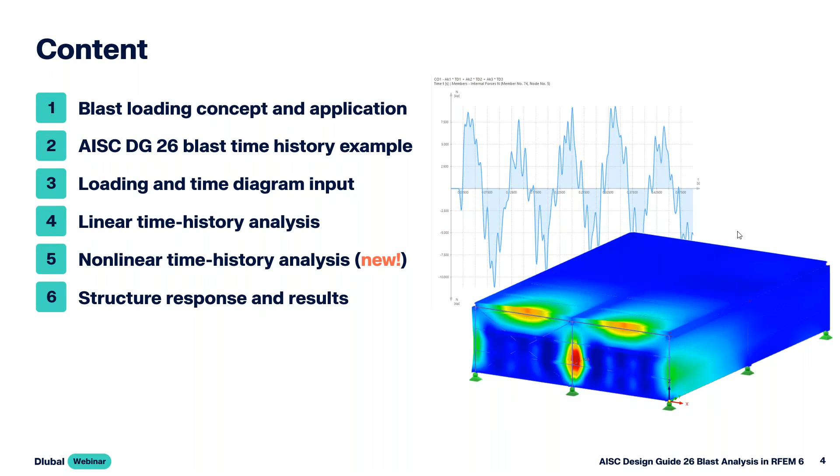So we'll turn now to the blast loading basics. The design resources we'll be referencing today are, of course, the AISC Design Guide 26, which covers the design of blast-resistant structures. The United Facilities Criteria, UFC document 3-340-02, will also be one of our resources. There are many other references and literature out there for blast analysis, but for our approach and example today, we'll be utilizing these two.

Let's talk about factors that influence structural damage when we talk about rare blast loading. The structure materials, mass, and stiffness are all certainly going to influence this. But we also want to take a look at the explosive type, and how close the distance is to the structure. Obviously, if the explosion is closer, we're going to see more localized and global structural damage than if the explosion is further away. The building geometry will also play an influence.

The blast orientation to the structure matters too. Elements facing the blast will see higher loads and more damage than elements that are parallel to the blast. And finally, the surrounding structures or adjacent elements can also affect blast patterns. We could see load amplification or load reduction.

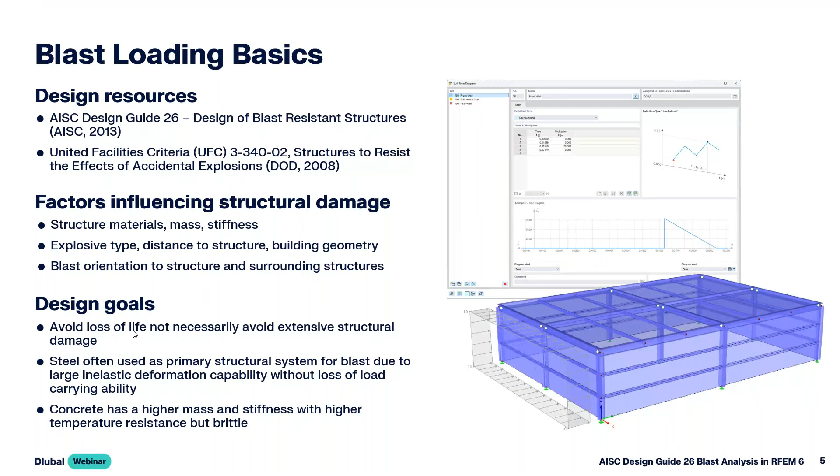Turning now to Design Guide 26 to talk about the blast load application and this idealized pressure time history for blast load.

We start off with the peak overpressure. This is the pressure above the ambient atmospheric pressure, hence the name overpressure. This is an instantaneous pressure arriving at the structure. We have this blast load taking place at time equals 0. It takes some time for the blast wave to reach the structure. So we have our time of arrival, and then we see this instantaneous rise in pressure on the structure itself.

We then have the positive phase duration, which is the time for the pressure to return back to that ambient pressure. We also have in the positive phase duration what we call the positive impulse - the total pressure time energy applied during the positive duration, simply the area under the curve. In addition to the positive phase, we also have the negative phase duration - the energy, the impulse, again that area under the curve that follows the positive phase, where pressure actually falls below the atmospheric pressure.

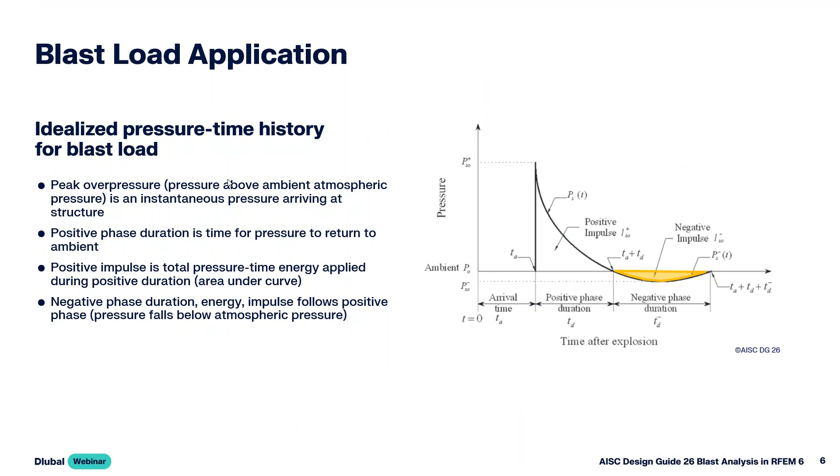We start first with the free field blast load, also known as the side-on blast load, where this blast travels parallel to a surface. It more or less sweeps over this surface with no impeding objects - so we might be talking about sidewalls, a roof, a rear wall. It's certainly not the surfaces oriented directly to the blast. We often see the subscript SO for side-on used throughout literature to represent this particular loading.

Then we have the reflected blast load, where the blast load strikes at an angled surface other than parallel. We might see this for a wall oriented directly normal to the face of the blast load itself. You'll notice that we have a reflected pressure value that's significantly greater than our side-on, and this makes sense because it's closer to the blast and oriented normal to the face of it.

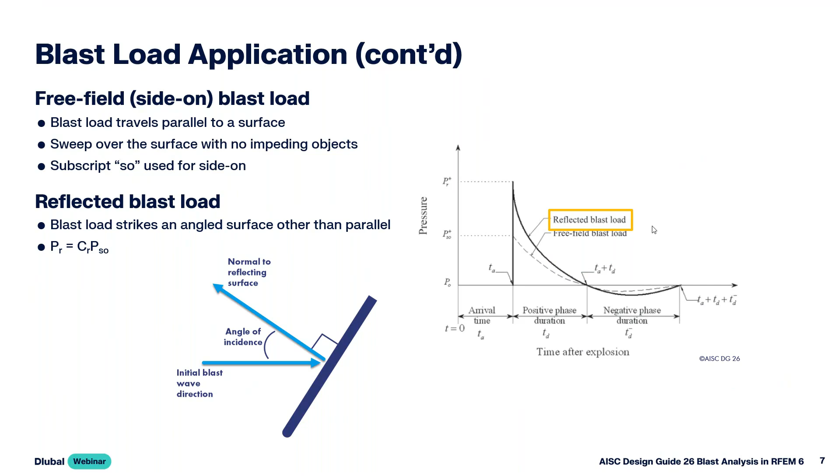Now we may be wondering, what is the angle of incidence along the x-axis? We'll refer to this small diagram on the left-hand side, where we have our initial blast wave direction, and this travels to our target element - this might be a wall element, for example. We're going to see this load reflecting normal to the face of the surface, hence why we see this 90 degrees here. The angle of incidence is then measured as this initial blast wave in comparison to this reflecting load, and this is ultimately what we use with figure 2-193.

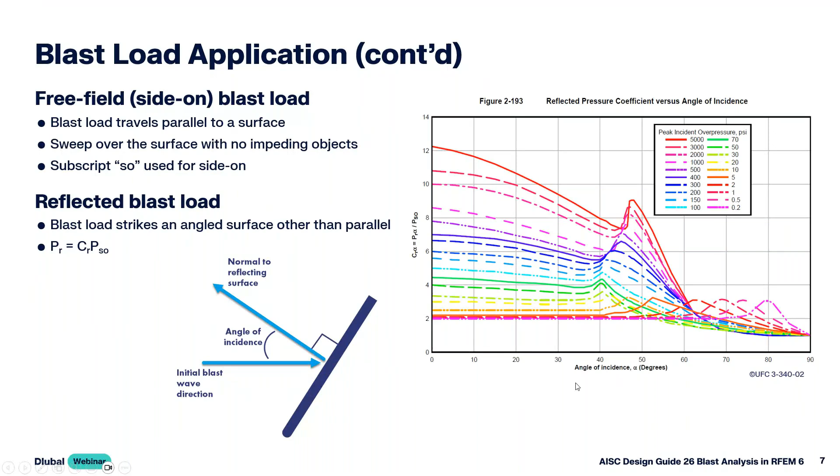The equation that we use for this duration is equal to 2 times I over P.

Moving on to the pressure time history for the negative phase, we're actually going to neglect this for this demonstration. A simpler approach here, but we certainly don't want to always neglect this. For example, when we have elements that are weaker in the reverse loading direction, or a structure with very short natural periods compared to the load duration, we certainly don't want to neglect this negative phase. But for example purposes today, we will go ahead and not take this into account.

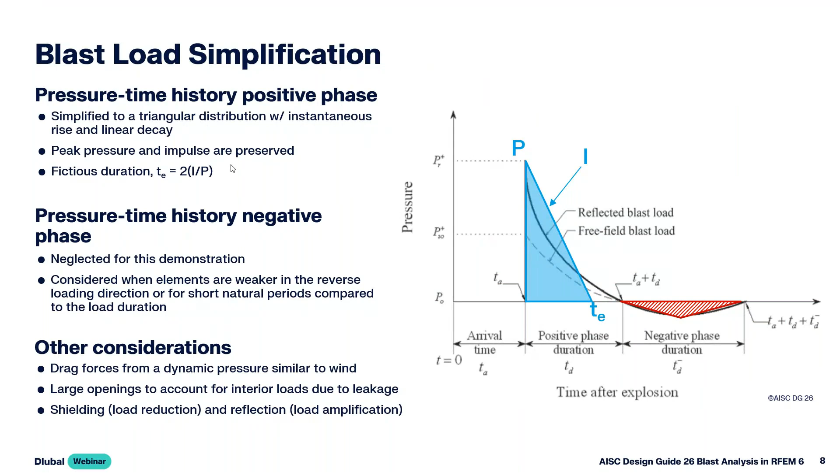Now, we won't be touching on either of these more seismic-focused add-ons for today. But finally, we do have the time history analysis, and this will certainly be a big part of our example once we get into RFEM, where we can apply these forces to the structure and tell them how they should vary in magnitude over a set time period.

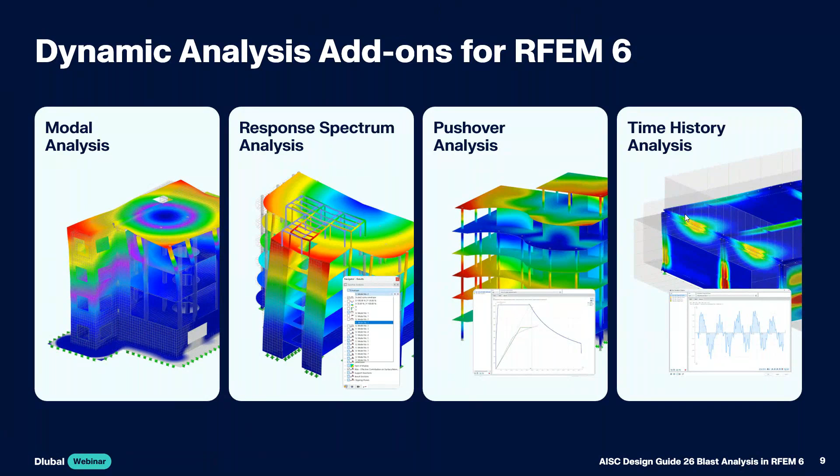Before we get into the program, we'll move on to our next slide, where we're going to lay out the example that we're pulling directly from Design Guide 26, example 2.1. In this example problem, we have a one-story steel structure, 50 feet in the short direction, 70 feet in the long direction, and 15 feet in height. I took a simple screenshot directly from the design guide, showing a plan view and an elevation view.

In the short direction, we have braced frames, and in the long direction, we have rigid or moment frames. All of the cross sections used should be hot rolled cross sections. And for our roof deck and wall panel, we will set these as ribbed metal decking.

And finally, we have the blast load itself. The blast charge weight is going to be 500 pounds, and the charge distance is going to be 50 feet. We can see this represented here, this blast load located 50 feet from the front face of the structure.

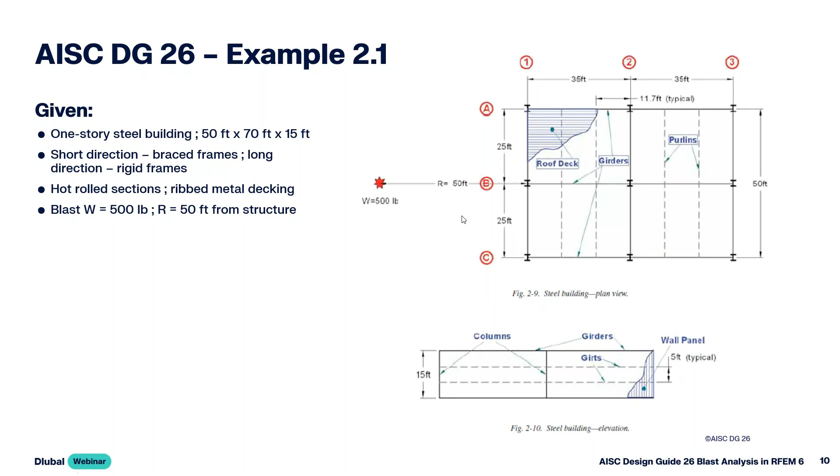Now we want to move on to our solution, which involves generating or calculating these time diagrams that we will eventually input into RFEM itself. We begin with the scaled distance Z. In Design Guide 26, this is a simple equation: our charge distance over the cubed root of the charge weight. We know this is 50 feet for the distance, 500 pounds for the charge weight, and we get a value of 6.3.

We're now going to refer back to UFC 3-340, in particular figure 2-15, because we need to determine all of these variables from the idealized pressure curve, which is done directly within this figure itself. Before we get into the actual values, there are some assumptions made with this particular plot. For example, this assumes a hemispherical explosion taking place at ground level. If you have an explosion that takes place up in the air, a spherical explosion, there are different plots that you should reference.

This also assumes that our structure is at sea level. If we have any other altitude, there are scaling approaches we could take directly from the UFC. This plot also assumes a fully reflected surface, so if we had any angle, remember a couple slides back, we'd want to refer to that reflection coefficient and angle of incidence to scale our pressures and variables accordingly.

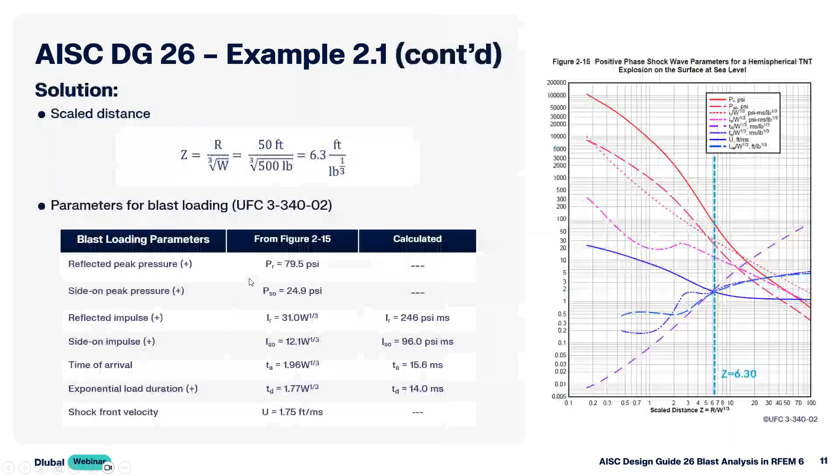Let us begin with the reflected pressure for the front wall. Following Design Guide 26, we simplify the idealized pressure curve with this equivalent triangular shape, but we want to ensure the peak pressure P sub r and the impulse I sub r are preserved. We don't know what this equivalent duration is, but we have a simple formula - we simply input the impulse and pressure. This information was given directly in figure 2-15 determined on the previous slide.

Now we move on to the side-on pressure - this is the time diagram for the sidewalls and roof. For simplicity and a more conservative approach, I am going to use the same scale distance Z at the front wall centerline for the sidewalls and roof. Technically pressures might decrease as we move along the length of these sidewalls and roof, but this is a more conservative approach. We have a similar triangular shape shown on the right-hand side, but we'd expect our pressures to be significantly lower, and our impulses will be lower as well.

Again we don't know this time duration, but we know P sub SO and I sub SO from the previous slide, figure 2-15. We input them into this equation and we are calculating here a time duration of 7.71 milliseconds.

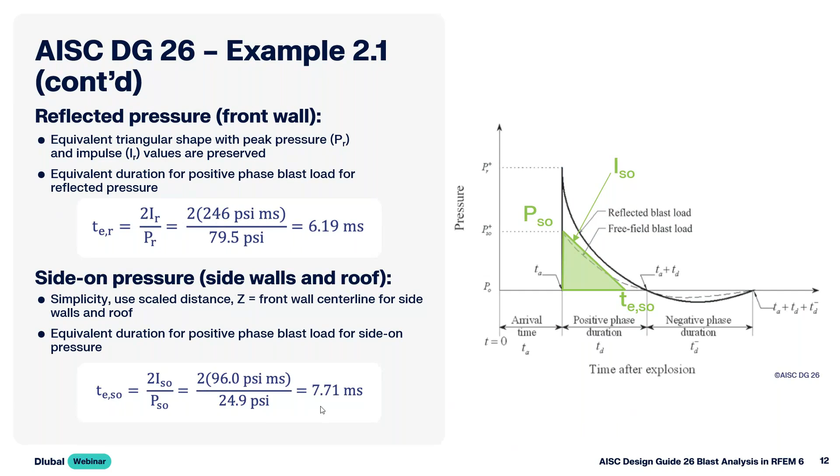Now finally we turn to the rear wall. For this one we want to modify our charge distance. This rear wall takes into consideration the distance from the blast to the front face of the structure, which is 50 feet, but then we also have the length of the structure of 70 feet. So our new distance adds these two together to get 120 feet. Modifying our scale distance with the equation r over the cube root of w, we input the 120 feet, we still have 500 pounds, and we get a value of 15.1.

We use the same UFC figure 2-15 here. We plot our Z value and get the various parameters now for our rear wall, presented within this table - again the positive phase duration. You'll notice I did not list any reflected pressures or reflected impulses. That's because this back wall is not exposed normal to the face of the explosion, unlike the front wall. So we're more interested in those lower pressures, like the side-on peak pressure and side-on impulse. Again, for that triangular distribution we don't know our time duration. We input this information and get a value of 19.1 milliseconds.

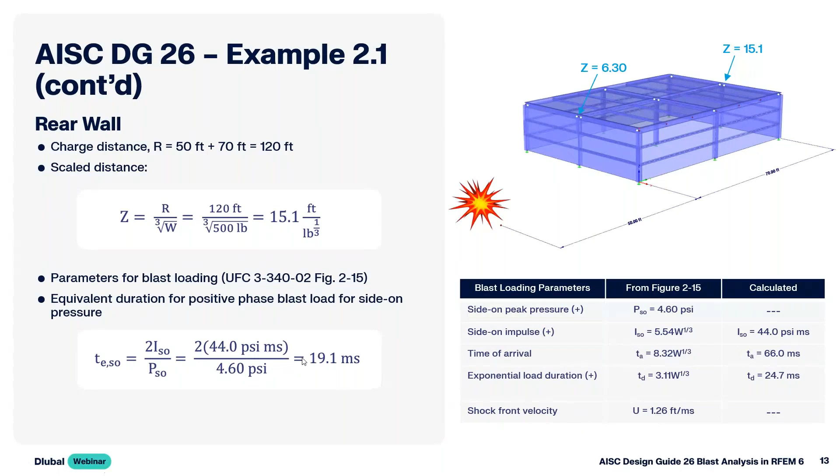Now the rear wall is a little unique too, in that we aren't going to have this instantaneous rise in pressure like we saw with the front wall or even the sidewalls and roof. It's going to take some time for the pressure to linearly increase to the value of the peak pressure, and then we linearly decrease. We know the time of arrival, that's equal to 66 milliseconds.

And that was just given directly from figure 2-15, as you see here on the previous slide. We are now looking to solve for T sub 2, which is the time to the peak pressure.

We account for this, given in Design Guide 26, by taking the time of arrival and adding L1 over U, where L1 is the span of the element parallel to the traveling wave. In our case, this is the building height of 15 feet. U is the shock front velocity, given directly in figure 2-15. We input these values into this equation and get a time duration of 77.9 milliseconds.

So now we know T sub A, we know T sub 2. The final time we need to determine is T sub F. This is a simple equation: we take T sub 2 that we solved for above, and add in the equivalent duration we solved for on the previous slide, taking into consideration the impulse and the pressure. We take 19.1 milliseconds, add it to 77.9, and get our final time point of 97 milliseconds.

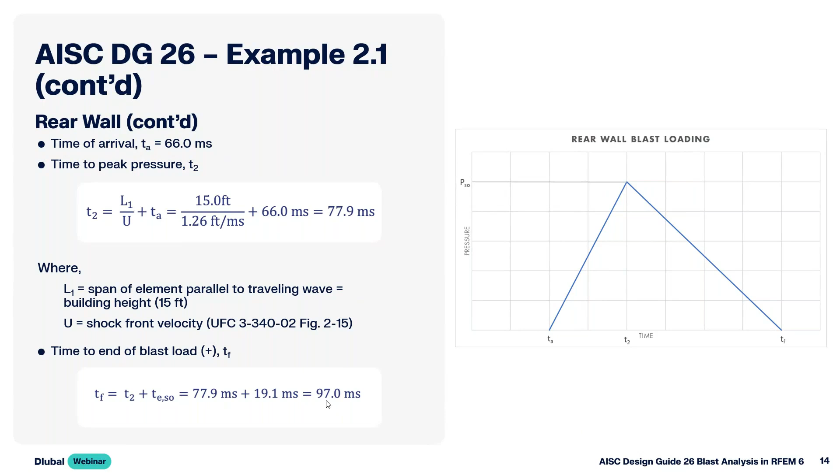Let's summarize a few of the assumptions again for this analysis. We're using this equivalent triangular loading function, much more simplified. There are more exact loading functions out there, for example the Friedlander equation, if we wanted to more accurately represent that blast wave shape. Also, the negative phase of the shock was neglected for this example, along with other variables we listed, such as dynamic pressures with drag forces and large openings, which are not included.

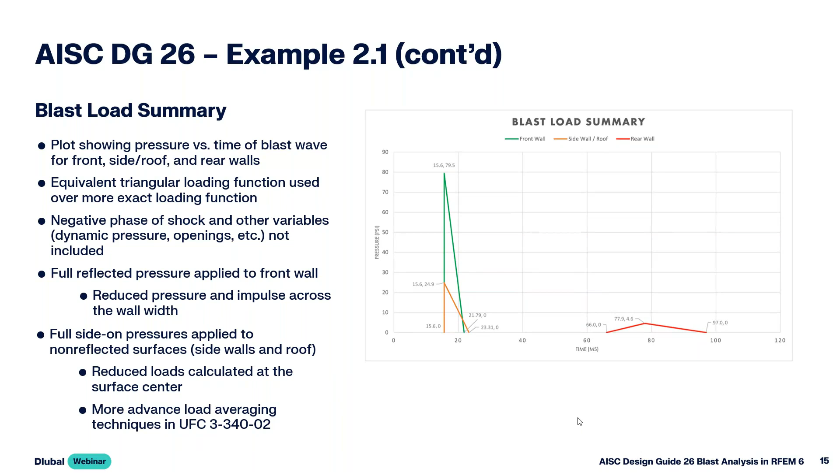Okay, so we are going to turn now to RFEM directly, and I will go ahead and launch the program. For the sake of time, I have already modeled our structure from the Design Guide example given, so we'll do a quick model review.

There were some assumptions made with the cross sections. We have W14 by 193 defined for our columns, A992 material. Our girders are defined as 18 by 130. We have our purlins, channel sections, 10 by 25, A36 material, and our girts, which are 10 by 30, also A36.

Now, because we have braced frames in our short direction, I added in some X bracing here. These are just going to be round circular sections, such as a rod, for example. But you'll notice that the member type here is unique.

All the rest of our members in this example are set to a standard beam. This is anything that's a standard beam, a standard column. But for my X braces, I have set this to a tension-only member. This means that it should only take tension forces. If compression is introduced into this member, it is deactivated within the static analysis. And if tension is reintroduced, it will be reactivated due to the nonlinear capabilities within RFEM. So just something to keep in mind there.

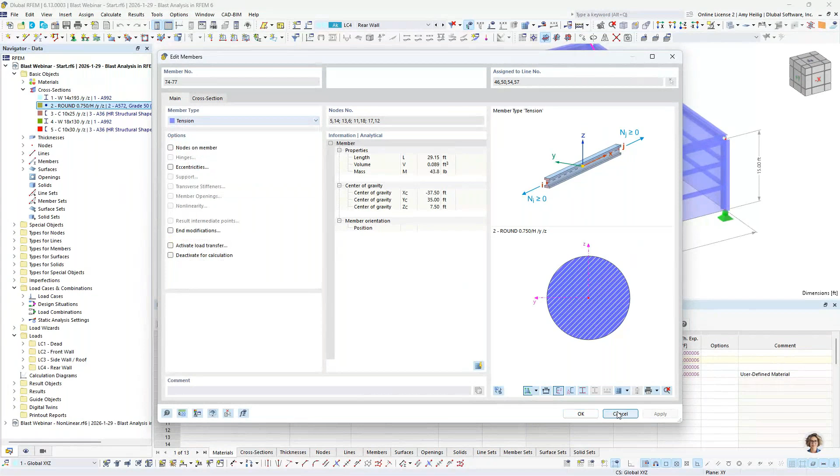Now, as far as our surfaces, all the surfaces are defined here. So we'll take a quick look at the front surface, for example. All have the material A653 applied to them and a set thickness. Now, this thickness is a bit unique as well.

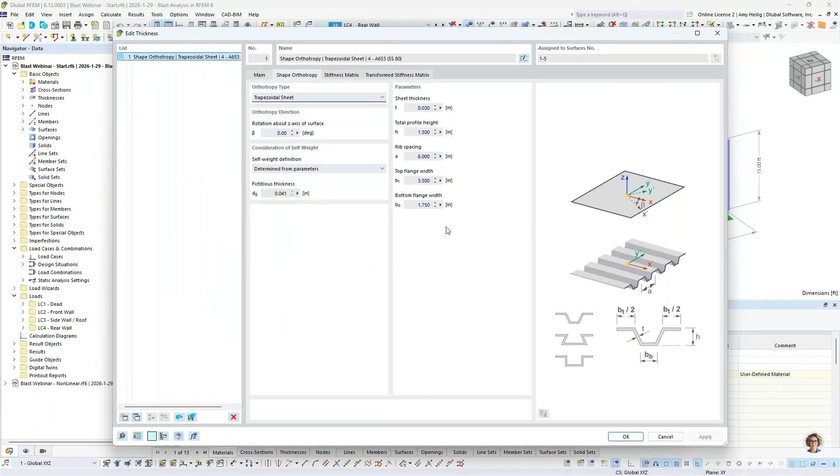If we take a look at the thickness type, normally we would set this to a uniform thickness, which is just any type of standard surface. But I did set this to an orthotropic stiffness instead. And with this orthotropic entry, we now get this second tab here where I can directly select something like a trapezoidal sheet. And I can input the sheet thickness, some of the geometric properties like the total profile height, the rib spacing, and so on. And the program is going to take all of this information for me and directly calculate the stiffness matrix based on this orthotropic stiffness properties. So this is all done automatically, and you have a nice view here of this stiffness matrix directly.

Okay, so the final thing just to note is, of course, the dimensions. We talked about 50 feet in the short direction, 70 feet in the long direction, 15 feet in height. And our blast analysis is going to be taking place about 50 feet away from the front face of this wall here. Now, we also want to cover our loading.

So I will launch our load cases and combinations dialog box. And under the base data, I have set here the ASCE 7, the latest 2022 standard. Now, this really doesn't play too much of an impact in our example today because I'm not generating my load combinations automatically. You can see this is turned off here.

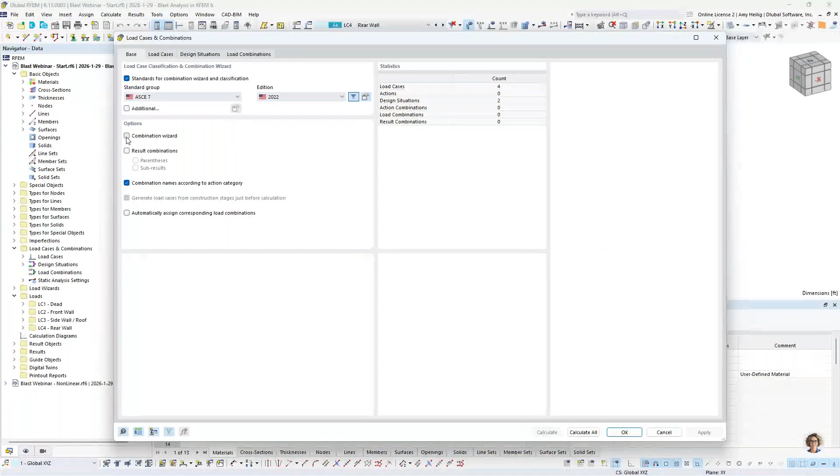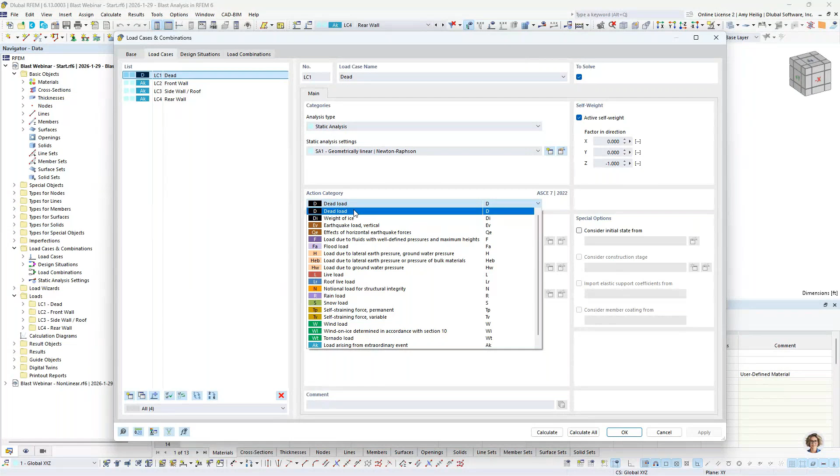Now, under the second tab, these are the various load cases that I've defined. And we start first with our dead load case. So we have self-weight activated within this load case. And I did assign the action category here based on the ASCE 7 to dead load. Now, again, this isn't so important. If we were combining into the load combinations automatically, the program would need to know this in order to know what load factors are defined. But just for a nice categorization, we'll go ahead and apply this to the correct action category.

I have 3 additional load cases here, including the front wall and the sidewall and roof, as well as the rear wall. So this is going to represent these loads from the blast being applied to the structure. The action category here is set to the load arising from extraordinary event. So now that we have our load cases defined, we need to actually apply the loads to the structure.

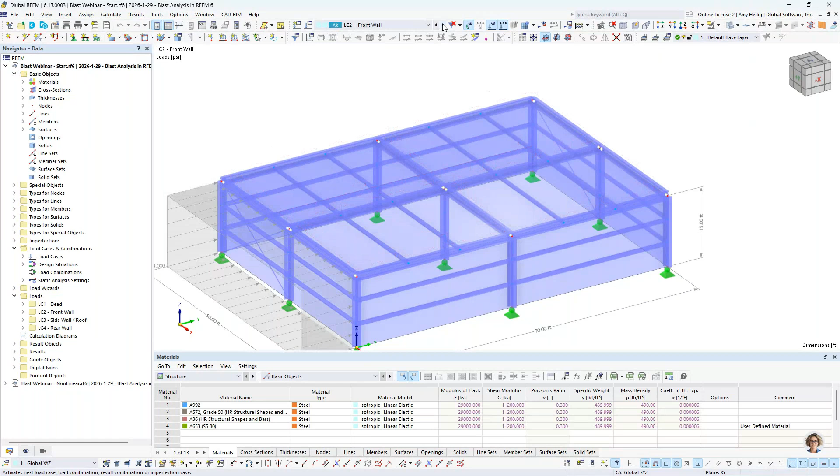And we begin with first our dead load. So remember, self-weight is considered here, but also I have applied an additional member load to my main girders up at the top of 0.1 kips per foot, just to account for any additional dead load within the structure. I then have that first load case here for my front wall. So you can see that this is a uniform load applied to this front face of this surface.

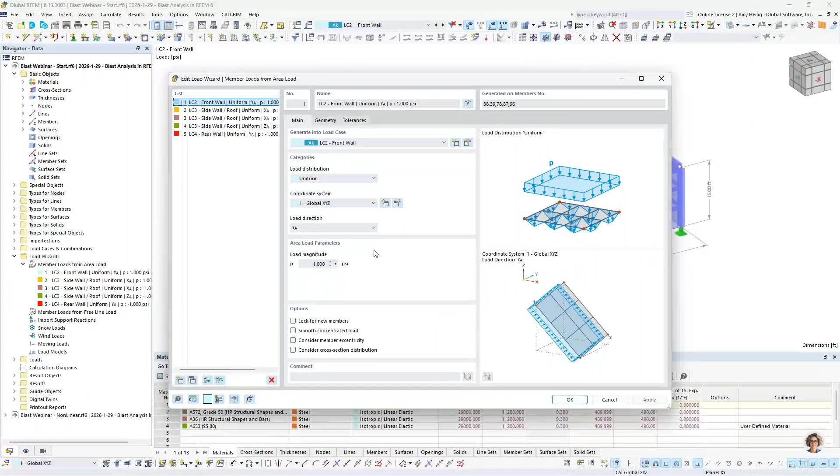Now, this load is a bit special in the sense that I did take advantage here of our load wizards over in the navigator, where I can apply these as member loads by specifying an area load. So if I double click on this load, we go into the load wizard dialog box. I have applied the load in the global Y direction towards that front face of that structure, and I gave it a load magnitude of 1 psi. This is just a simple unit load. So we're going to later on define the time diagram where this load is going to vary in magnitude. So we don't want to do it here with this applied load. This is why it's just a simple 1 psi.

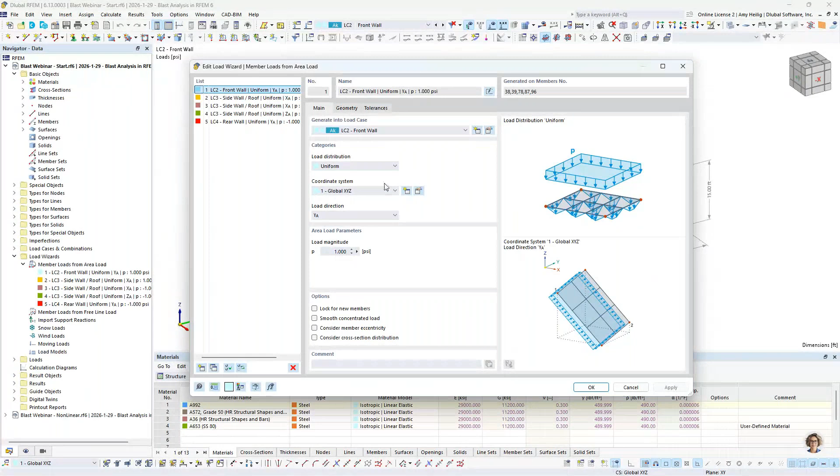Now, if any of your units are incorrect, you can always access down here the units and decimal places and make adjustments to that. So we also have the ability here to select the 4 points for this area load, and we can also neglect members. So for example, I didn't want to consider the load being applied to my girts.

So once this is done, you'll see we get a nice view here of the tributary area of the members that this load will be applied to. And we can take this a step further by right-clicking and displaying separately to see the load actually applied to the structure itself and the particular members that I have selected.

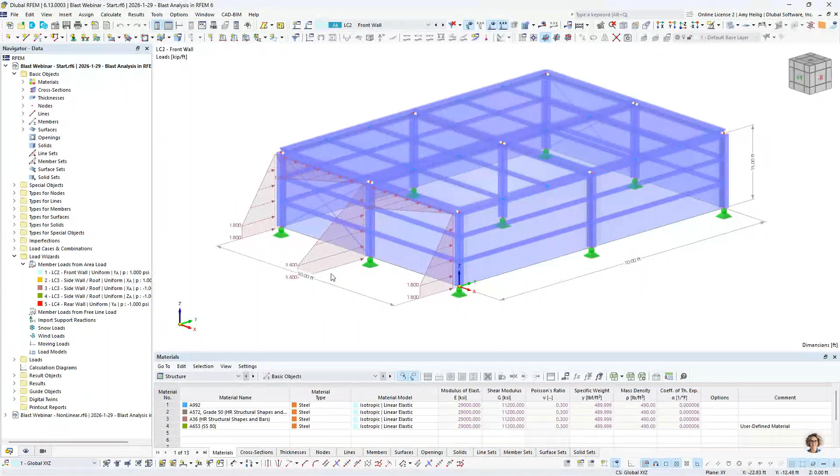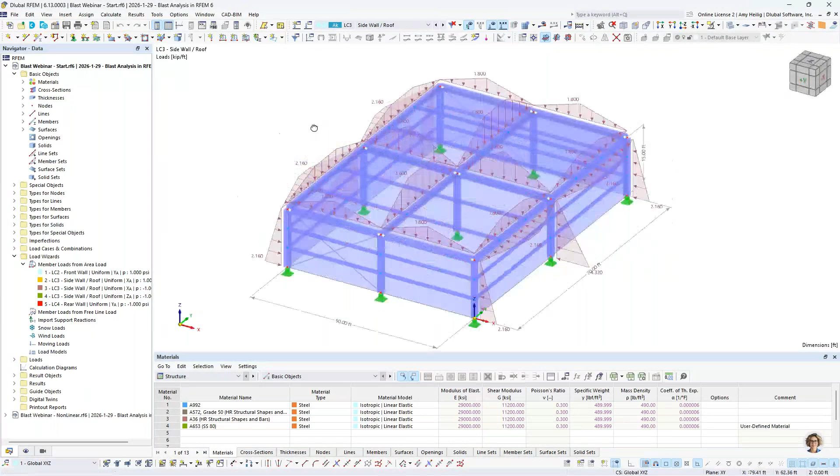So we can right-click to turn this back to a uniform load display, and we can take a look at our second load case for the blast load. Very similar concept here, but this time it's applied to the sidewalls and the roof. We can right-click here to display separately, and again we see those loads distributed here to the main members, neglecting again the girts and the purlins. And finally, we have our last load case here for our rear wall, so same concept there.

So now that we have these loads defined on the structure, we're ready to move forward with our dynamic analysis. And for this, we need to activate our base data dialog box. This can be found by right-clicking on the model name here in our navigator, or it can be accessed through our quick tools up here in the top. This is essentially the dialog box that will pop up when we create a new RFEM model.

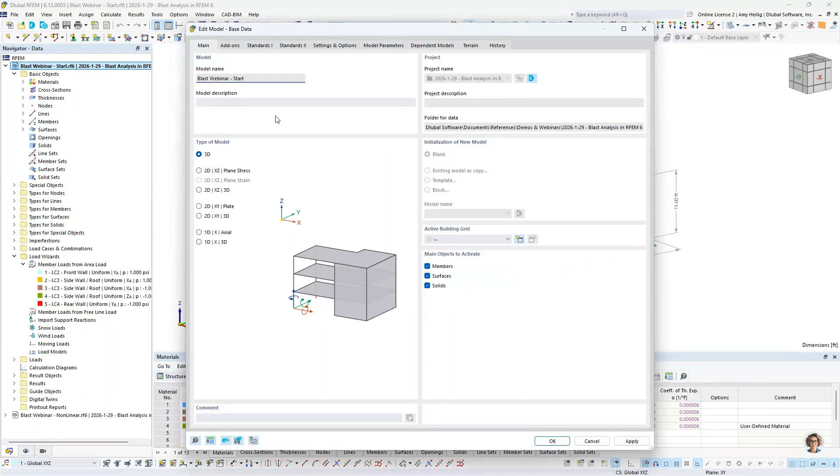And under this second tab, you'll see here, these are the various add-ons that we can go ahead and activate within our RFEM model itself. For today, I am going to move forward with both the modal analysis and the time history analysis.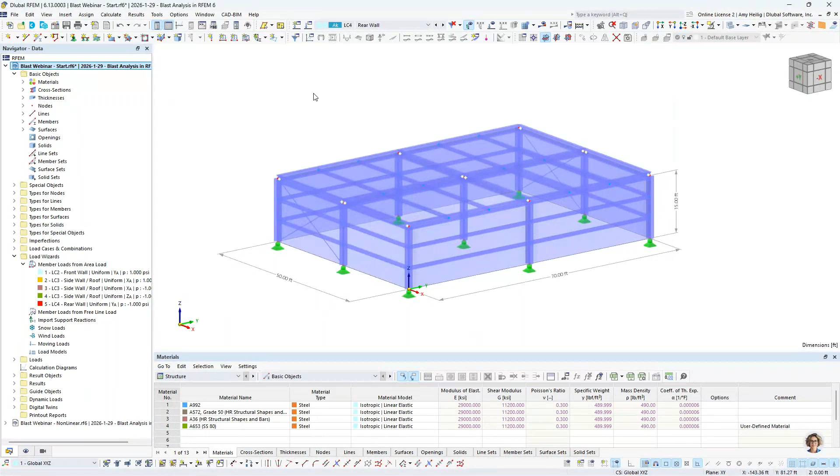So when we activate those add-ons and come back into RFEM, you can see that really doesn't look too much different. So what we want to do is to go into the load cases and combinations dialog box, and I'm going to create a new load case here. This is going to be for my modal analysis.

Now the analysis type here is going to be toggled down to modal analysis. This is available to me because I've activated that particular add-on. We then want to adjust the modal analysis settings. So for this, I'm going to calculate a total of 40 eigenmodes.

I want to make sure that I get enough mass participation, that I kind of understand what's going on with our structure. We'll go ahead and leave this as the Lanczos solver. I'm going to modify the mass matrix to diagonal.

Now remember that this blast load is traveling from the front of our structure to the rear of the structure in the global Y axis. We can't see that because of this dialog box, but that's kind of what's happening there for the overall analysis. So therefore, just for a quick calculation and to really hone in on what's going on in the Y translation direction only, I'm going to deactivate the additional degrees of freedom here for my mass matrix.

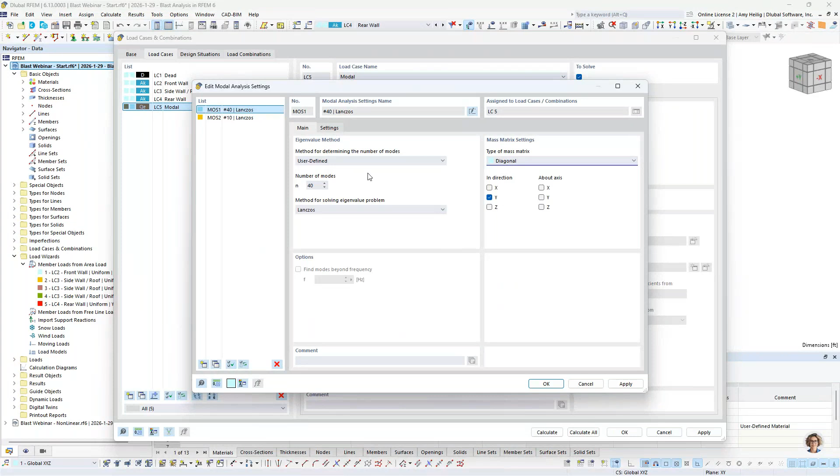Now for any further information on the different mass matrix types, solver types, you can always click on this info button in the lower left-hand corner of these dialog boxes. This will take you directly to our online manual and this particular dialog box to explain these options further. Now the additional settings here can all be left as default, so I can click OK.

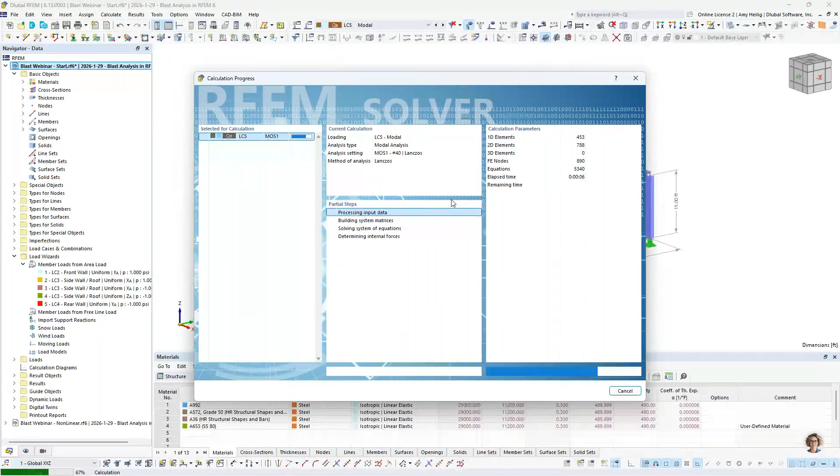We are going to import in the masses from our dead load case. We also have the ability, if we wanted to create a mass combination, we could do so. And essentially, we'll get a pretty quick analysis here. Again, the program is going to determine those 40 different eigenmodes, and we are presented with our analysis results.

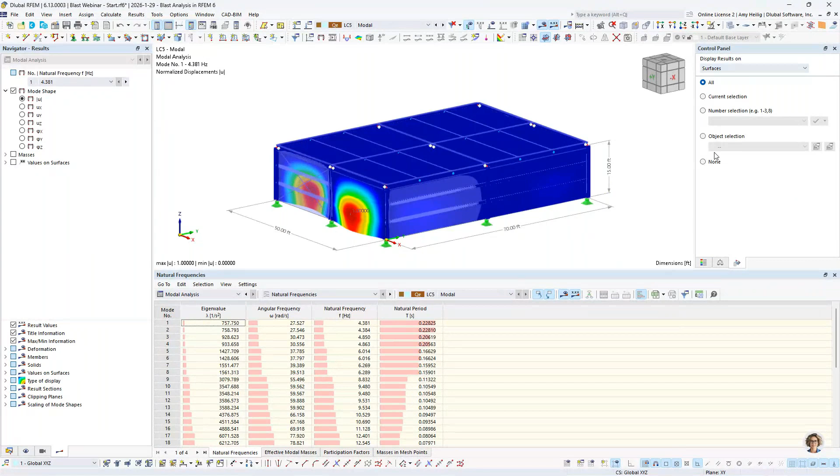So you see here that we have our modal analysis results presented to us in table format, and we now have a new tab over here in our navigator with the results shown as well. Because these loads are being applied to the members themselves, I'm not so interested in what's going on here with the surfaces. So I can always deactivate the surfaces from the display of my results by toggling this to none, and taking a look at the members themselves, and in particular, the second tab within the table.

We want to determine here what are our dominant mode shapes. Remember, we're only looking in the Y direction. And as I scroll down through this table, I see mode number 9. This certainly has the most mass participation, so this will be one of our dominant modes. And I want to note here that the natural frequency is updated over on the left. So we'd want to write this number down, 8.832 hertz, because we're going to utilize this later on for damping purposes.

And then we continue scrolling down to maybe find our second dominant mode, and that's going to be mode shape number 27. And we have a frequency here of 15.963. So we'll go ahead and write that one down as well.

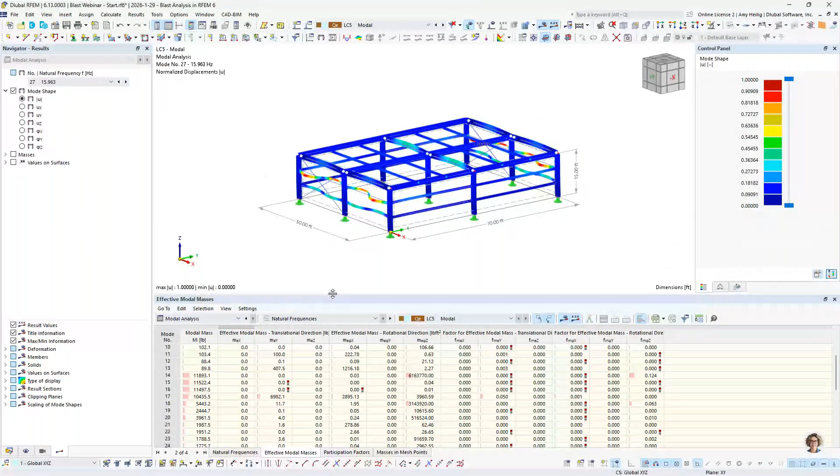Now that we have this information, it will make a little more sense as we move forward. Under the first tab, you can view mode shape number 9, where we can see the angular frequency, natural frequency, and natural periods. We're also interested in mode shape number 27. Keep those natural frequencies in mind, as we'll return to them when inputting the damping for the time history analysis.

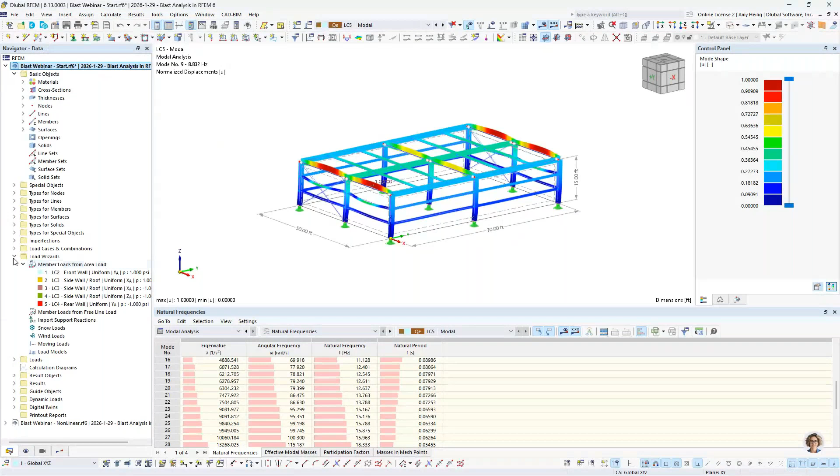Now that we have completed a quick modal analysis, let's move on to the time history. In our navigator on the left, there's a new folder called Dynamic Loads. This is because I've activated the time history analysis add-on, where I can directly define my time diagram. So I double click to create my first definition here.

Within my time diagram, this is where we begin inputting the information we determined from those slides and from Design Guide 26. We'll start by giving this a new name, and we'll call this one Front Wall. As far as the time diagram input, we have two options: we can set this to user defined, where we input the table values directly, which is what we'll use today. Alternatively, if you had a function—recall the Friedlander equation representing that idealized pressure curve in more detail—you could input that function directly in RFEM as well.

For our front wall, taking advantage of the user defined option, let's go back to the PowerPoint because I want to focus on this time diagram for the front wall only. We've already determined all of these points from our previous calculations: an instantaneous rise in pressure to 79.5 psi, then a linear decay back to 0. We've already determined the time values at each of these points, and these are what we'll directly input into RFEM for our first time diagram.

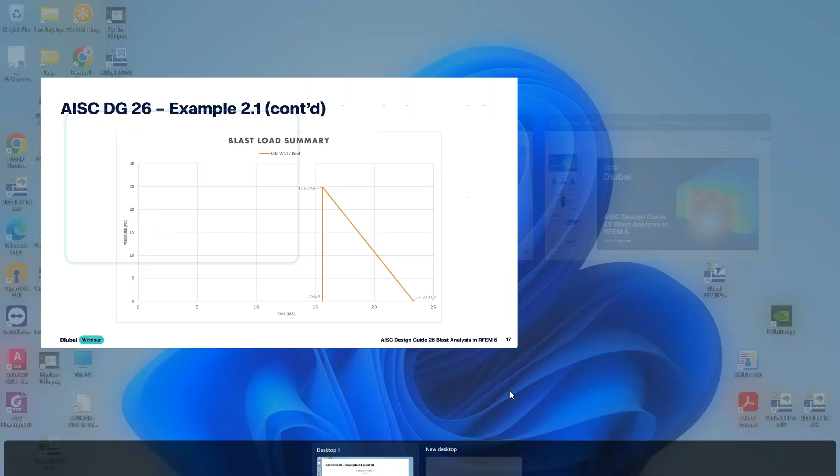Now that we have this first time diagram defined, I'm going to make a copy of it for my sidewall and roof. Going back to the PowerPoint for a quick overview of the sidewall and roof time diagram we calculated: it's the exact same shape as the front wall, with an instantaneous rise in pressure, but the peak pressure here is significantly lower because it's not oriented directly towards the blast. Then there's a linear decay back to 0. We already know all of these times, as we've solved for them, and this is the information we want to put directly into RFEM for our second time diagram.

The first three time inputs are actually all the same, but we do want to modify our multiplier here, which is the peak side-on pressure, to 24.9 psi.

And then our linear decay back to 0 is also slightly adjusted from our front wall, and this will be 0.02331. So with the program plotting these various points, we now see our time diagram that reflects our PowerPoint slide that we were just taking a look at. So we then have our final time diagram.

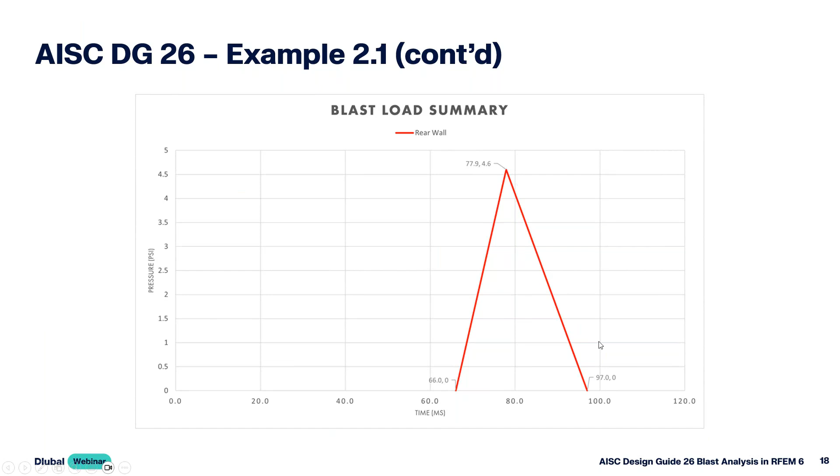And for this one, I'm going to create a new definition here, and this will be for the rear wall. We'll go back to our PowerPoint for the final time here to take a look at the time diagram we have determined for the rear wall. Now remember, this one looks a little bit different because it does take some time for that blast wave to reach the structure, but we have a linear rise here to that peak pressure, and then we'll see it decay linearly back to 0. Again, we know all of these points here, so this is directly what we will input in for our third time diagram.

The time 0 with a multiplier of 0, and then our second point will be 0.066, with a multiplier also of 0. Our third point will be 0.0779, and a multiplier of 4.6. Our final point is going to be 0.097 with a multiplier of 0. So therefore, we see that relevant time diagram shown here that replicates what we just saw in the PowerPoint.

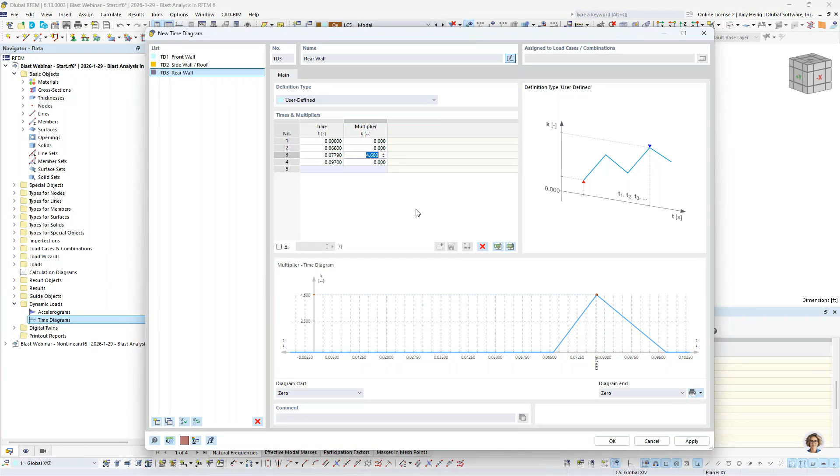Okay, so now that we have created these time diagrams, we need to actually correlate them with those unit loads that we had applied to our structure under the load cases. We'll go ahead and click OK through this dialog box, and we're going to go into our load cases and combinations. Now, I certainly could run a time history analysis for these individual load cases, as you see here within our dropdown, but that's not the intent of this example. The structure is not going to experience the front wall blast initially, and then the side wall and roof separate from the front wall and rear wall. All of this is happening at one time, but the magnitudes are going to vary over that time duration.

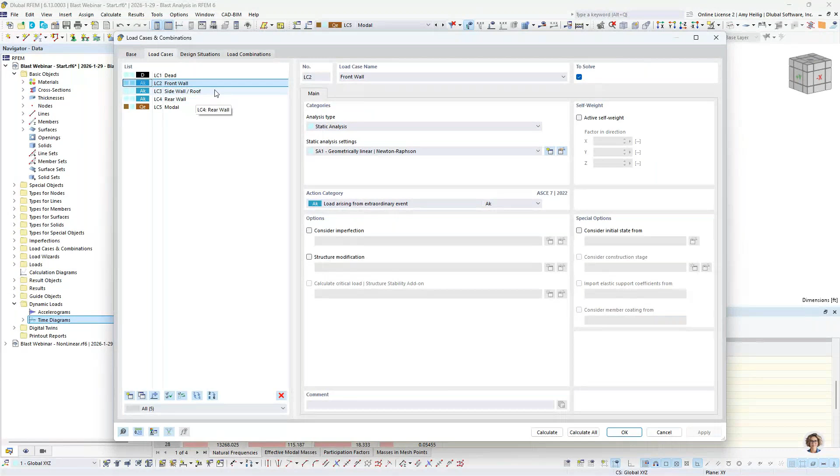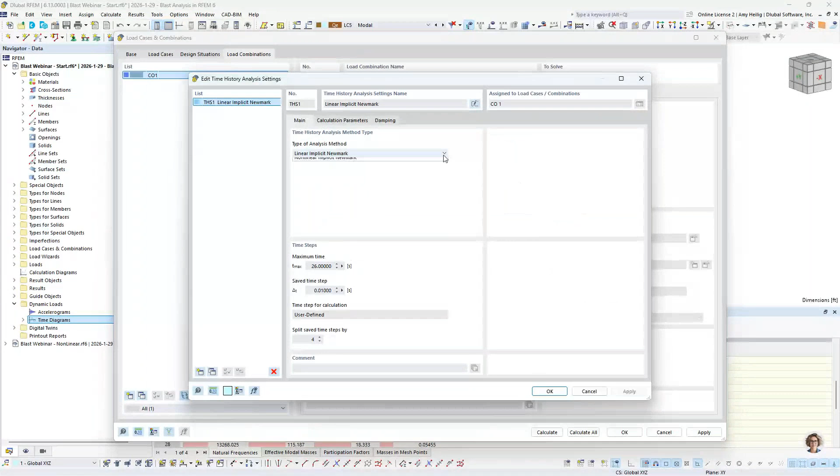And the only way to combine all of these into a single time history analysis is under our load combinations tab. So we create a new load combination definition here, and the analysis type is going to be set to time history analysis. Well, now we have our time history analysis settings that we'll want to go through in a little bit more detail here. So within the dropdown, you'll see that we have two linear solvers, including the linear modal, which is going to be a decoupled system that's based on the model's eigenvalues and mode shapes.

So a modal analysis with this solver is incredibly important. We want to make sure that we do have an accurate modal analysis. Now, for our example today, we are going to utilize the linear implicit Newmark solver instead. So this is a direct time integration method. It does require sufficiently small time steps, but a big difference here is that we don't need that modal analysis whatsoever. So the modal analysis that we carried out earlier in this example technically isn't needed. I am going to use it for damping purposes, which will again make more sense in just a few minutes, but the modal analysis is not necessarily needed for this solver.

So with both of these linear solvers, keep in mind that any nonlinearities are automatically going to be converted to linear elements underneath the hood for this dynamic analysis. So if we had a nodal support that fails in uplift, but in downward compression fully re-engages, underneath the hood for the dynamic analysis, it will be just converted to a linear nodal support. For our example today, we have a tension-only member. Well, for a linear solver underneath the hood, it's converted to a truss element. So it will take both tension and compression forces, and this is just simply a limitation of these linear solvers.

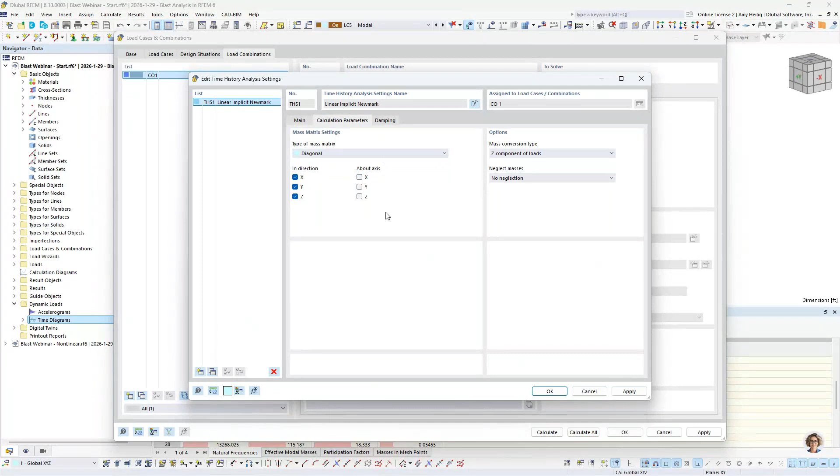For the calculation parameters, I will modify the mass matrix to a diagonal matrix, though there's maybe not too much difference between the consistent versus diagonal here. I'm going to uncheck the degrees of freedom for rotation about my global axes, but leave translation activated for this mass matrix.

Finally, we have our damping. When we talk about the Newmark solver and damping, we always refer to the Rayleigh damping parameters, alpha and beta, where alpha is the mass portion of that damping matrix, and beta is the stiffness portion of that damping matrix. So we want to ensure these parameters are input correctly.

Now, most of us might be used to Lehr's damping, where we just have a set percentage to input for the damping itself. We have a nice tool here where we can convert from Lehr's damping to Rayleigh damping by inputting the natural frequencies of our two most dominant mode shapes. So that should ring a bell - this is why we carried out that modal analysis to determine what the two dominant mode shapes are.

Remember, we wrote down the relevant frequencies from mode shape number 9 as 8.832 hertz, and our frequency from our second dominant mode shape, mode number 27, is 15.963 hertz. Now, the Lehr's damping is 2% for this structure, so I can input this information directly, and you'll notice alpha and beta are directly calculated for me. A nice feature directly for the damping considerations.

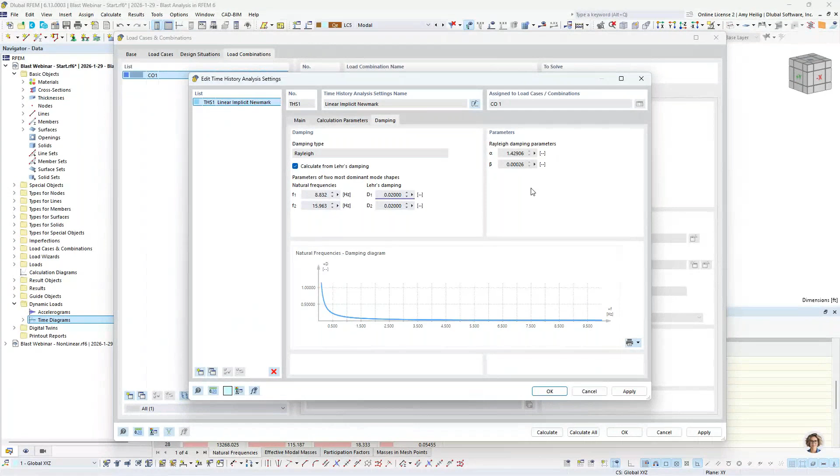Once all of this information is input, we're going to import the masses from the dead load case once again. Under the assignment, this is where we want to move our 3 different load cases over to the right-hand side by double-clicking on them and relate them to the relevant time diagrams. So we have our front wall, related to time diagram number 1, our sidewalls and roof, related to time diagram number 2, and finally our rear wall, related to time diagram number 3.

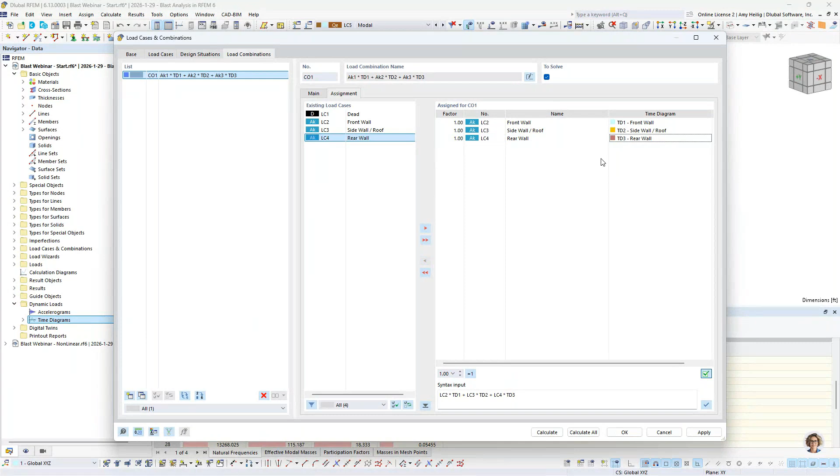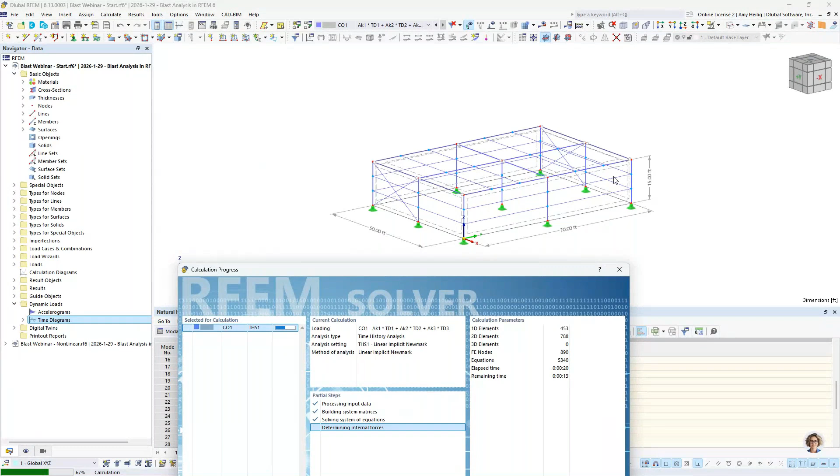So I'm going to begin this calculation here. For this linear solver and the time steps I have set, we'll see this solve pretty quickly. What's happening here in the background? We're now going to apply each one of those unit loads - remember, we had the area load at the front face, the sidewalls, the roof, and the rear wall of the structure. Now we're going to apply those 3 separate time diagrams to tell the program how the load magnitude of this blast wave should vary over the total time duration of 0.5 seconds.

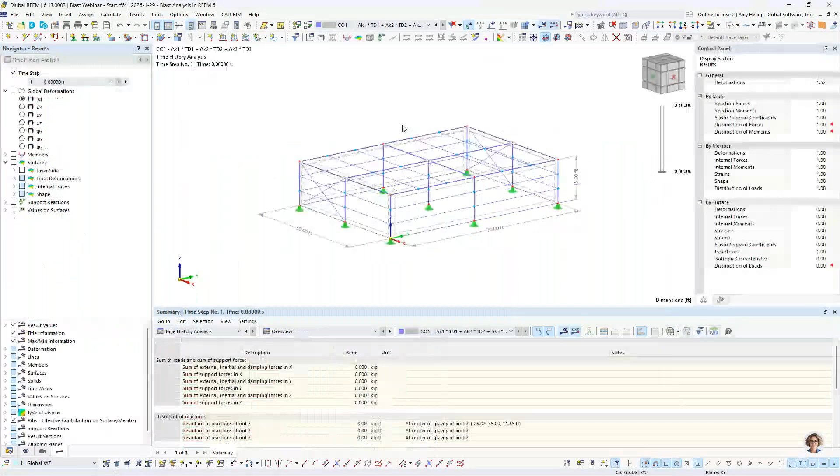Ultimately, once this calculation is done, we'll see our results here within the navigator over on the left, but I'll also go ahead and activate my surfaces within table format. As we take a look at the saved time steps here within our dropdown, we cycle through these and we see not much is happening.

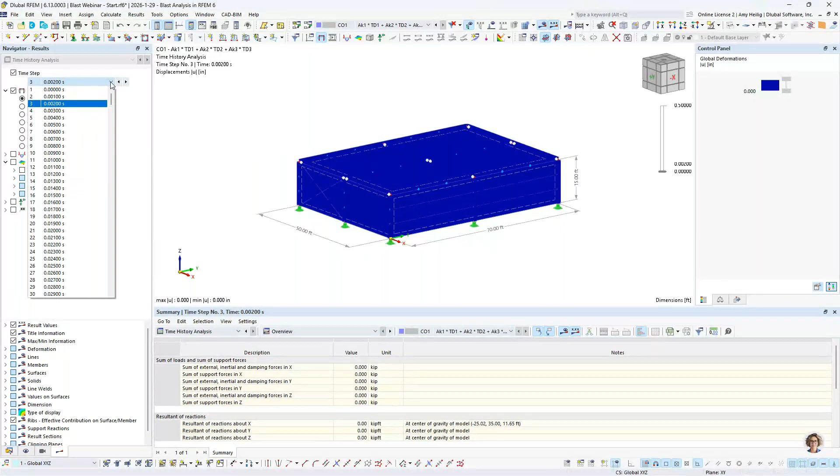But remember, it's going to take a small time period before this blast wave actually reaches this structure, and that happens at 0.016 seconds. This is where we start to see deformations on the structure. So we can cycle through these time steps to see the deformation graphically change as that wave load moves from the front of the structure to the rear.

Now, the time history analysis results are also available here in table format. So for example, if we're interested in the internal forces of our members as an envelope solution for this time history analysis, we can export this information to Microsoft Excel with the click of a button for further sorting. This could certainly be beneficial to review as well.

One other nice feature you may not be aware of is up here in our tools, we have what's called the calculation diagram monitor. So I can activate this and you'll notice it populates down here, and maybe I temporarily close out my table. This has a drop down here that includes all of the result information from this time history analysis.

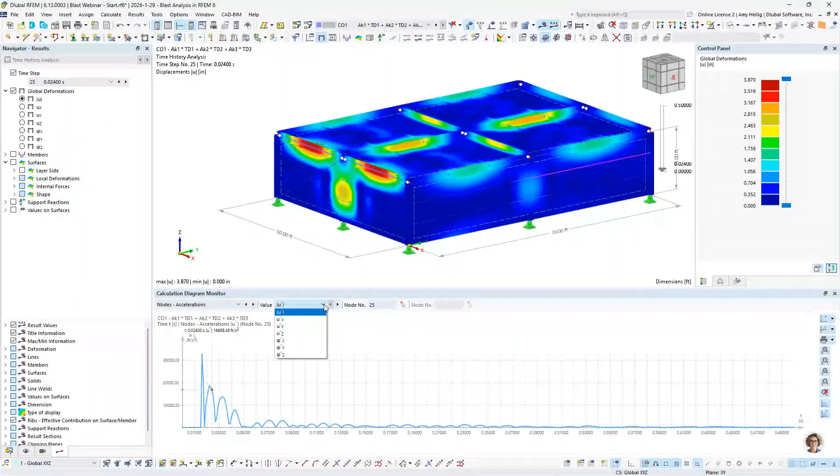So if I want to take a look at my acceleration of a particular nodal point, I select that here. I could graphically select maybe a node at the front of the structure, and maybe I'm interested in the accelerations in the y direction. So we see that plotted here within the diagram monitor over the 0.5 second duration. We could also toggle this to maybe the global deformation of that same node, and maybe I'm interested in the global Y deformation only. Again, we can see that plotted out as that wave load moves from front to back of the structure. We can also right click under the time steps to start this animation.

You'll notice that the program is moving through step by step here. The deformations are changing graphically to show you in more detail what's going on.

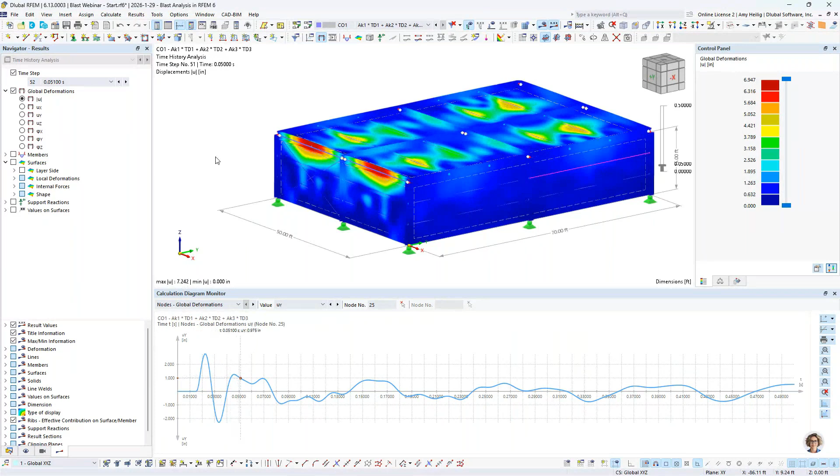The final thing that we'll touch on, under the navigator for this linear analysis, is the calculation diagrams. This is actually very similar to the calculation diagram monitor. The benefit of this though is that we can create as many calculation diagrams as we want, and this will actually be saved to the model.

So we can begin with first a time history analysis with our analysis type. The program says, oh, okay, I need to toggle this to my load combination, because that's the only time history analysis I carried out. We have our time on the x-axis here, and on the y-axis, we have that exact same information that we previously saw with our diagram monitor.

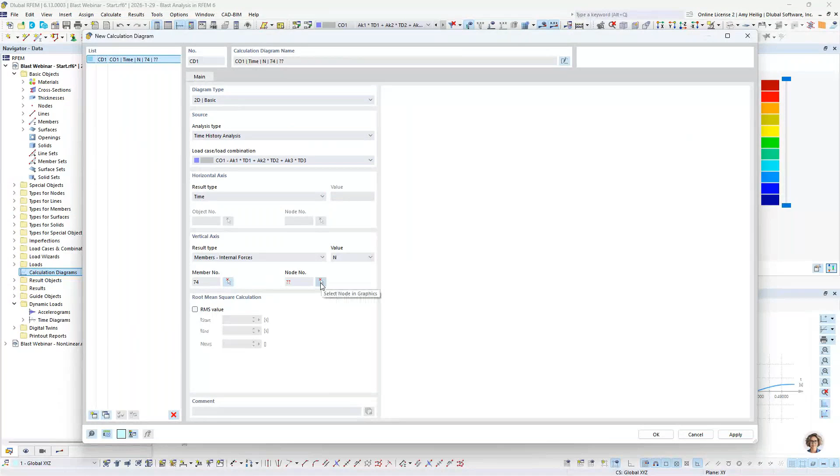Perhaps we want to take a look at the member internal forces, and I'm going to select here the axial forces, and graphically select my tension only member, member number 74. I also need to choose a node along that member in order to plot out the internal forces at that particular location.

And what you'll notice is that this tension only member certainly has tension forces in the positive region of this diagram, but because we're utilizing that linear solver, it is converted to a truss element underneath the hood for this dynamic analysis. So now we're seeing a lot of compression forces within this member as well. So we'll wrap up here the linear analysis.

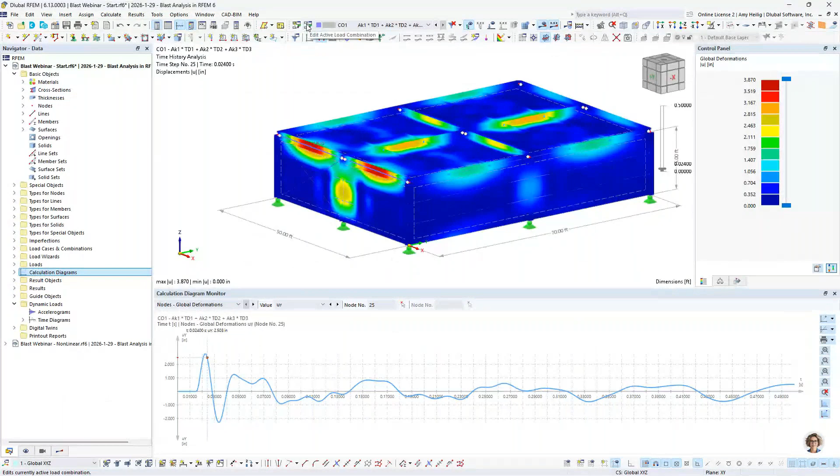Now, because we have these nonlinear elements, maybe we want to turn now to a nonlinear time history analysis. So I'll go ahead and click OK in this diagram, and we will revisit here our load combinations dialog box. This is quite easy, as I'm going to make an exact copy of my existing load combination number 1. You can see it copied here, but I'm going to go into the time history analysis settings, and make a copy of my existing settings, and select here the nonlinear implicit Newmark solver.

As mentioned, this was released relatively just a few months ago, and this is a phased release, so not all nonlinearities are accounted for right now. For example, we put a lot of effort and testing into member nonlinearities, nonlinear nodal supports, nonlinear member end hinges, but something like a nonlinear material is not quite ready. The program will give you a warning if there's something that's maybe not supported yet or untested, just so that you're very aware of what's available with this particular solver.

But with our tension only member today, this should certainly be considered with the nonlinear implicit Newmark solver. Now, it's important that we decrease our time steps even further.

So I'm going to add an extra 0 here for my save time step, 0.0001. I'm not going to split the save time steps any further for this particular nonlinear calculation. Again, we'd probably want to carry out a time step study.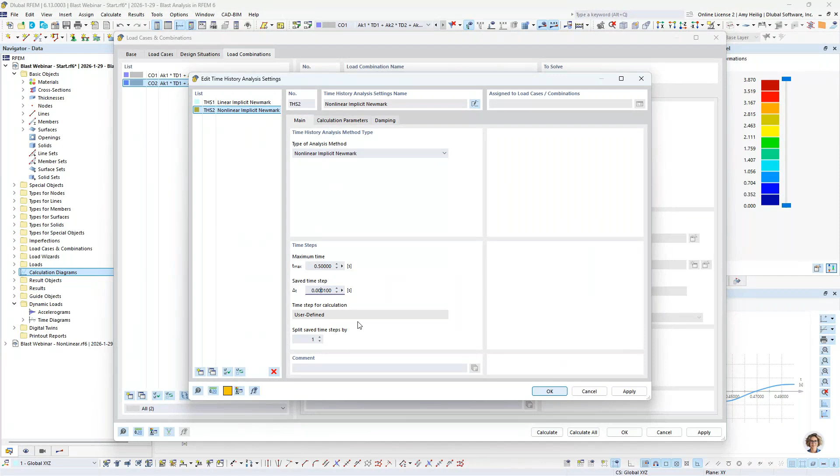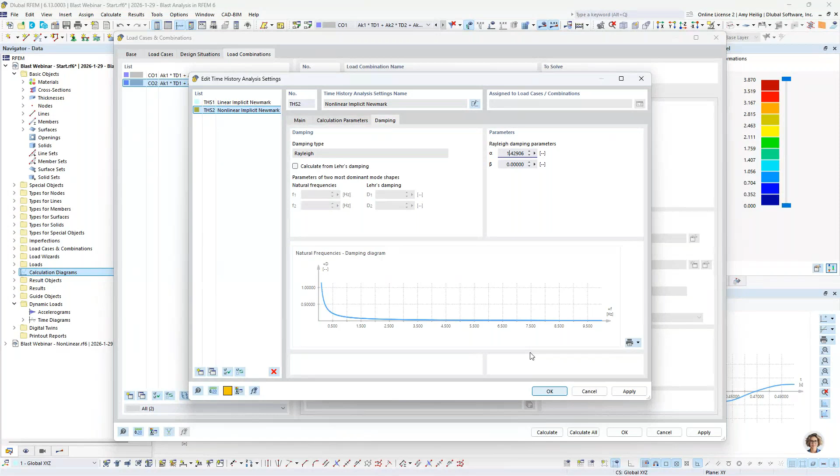For the damping, it is important to know that in the current state for this nonlinear Newmark solver, we cannot consider the beta damping parameter. So it would be best to actually set this to 0. Now alpha is still considered, and we will continue to improve on that in the future as well. But we do need to get convergence for this calculation, and we can only do so by setting beta equal to 0.

So once this information is set, we're really ready to run the calculation by selecting these new analysis settings here that we just defined for the second load combination. Everything else is the same under the assignment tab. Again, those load cases are associated with the relevant time diagrams.

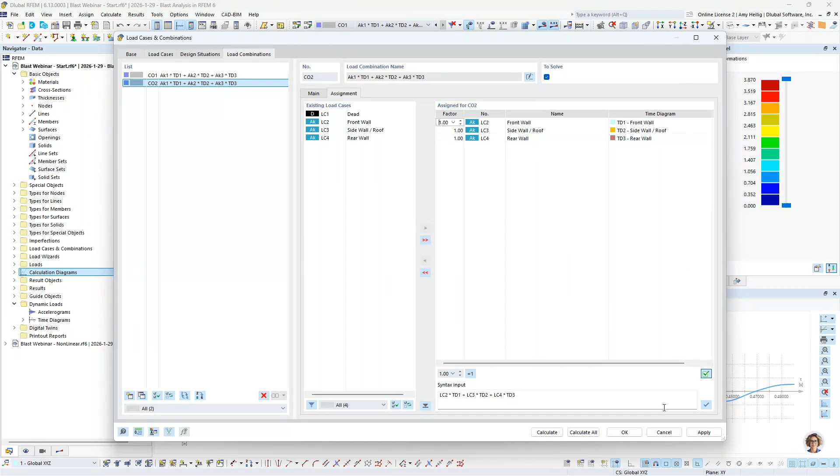Now, I have an already saved model here that I'll go ahead and open up because the calculation does take a few minutes longer for that nonlinear analysis. Everything that we saw for the linear analysis is still relevant. We can take a look at the various saved time steps here, the global deformations, this calculation diagram monitor. Again, everything is still equivalent for the nonlinear calculation.

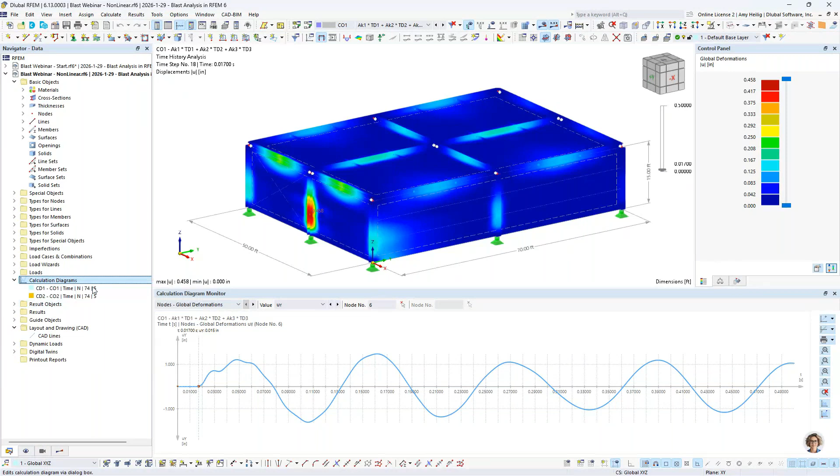The difference here, though, is that let us revisit our calculation diagram. So if we go into that calculation diagram, remember, this is exactly what we just saw for our linear time history analysis. Well, I made a copy of this one by using the copy tool down in the lower left to select here my nonlinear time history analysis, that load combination number 2 here.

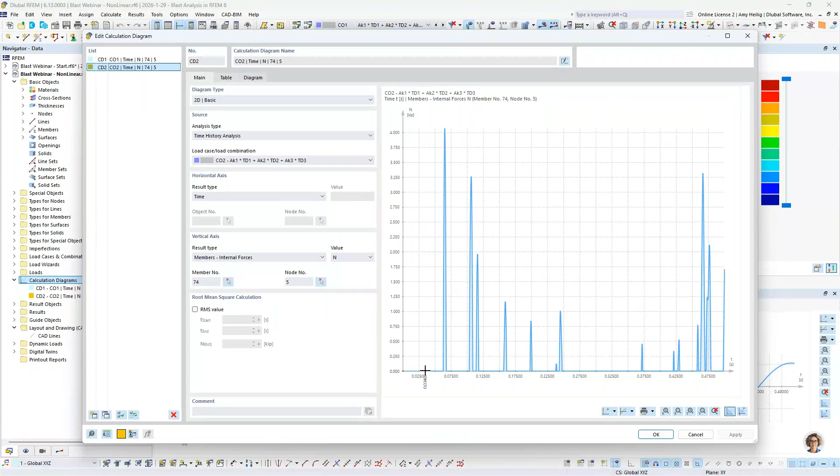And we can see that it's a pretty big difference. We are now able to account that this is a nonlinear tension only member. Therefore, we should see only tension forces in the positive area of this diagram. The minute that it sees compression, it's completely deactivated from the calculation. So certainly a significant difference here if we are wanting to consider those nonlinearities.

If I do zoom in here, it's also important for these nonlinear calculations that we get these more or less smooth curves here. If you're seeing very jagged results in this diagram, that probably means that you need to decrease your save time steps and possibly even your time steps for your calculation further.

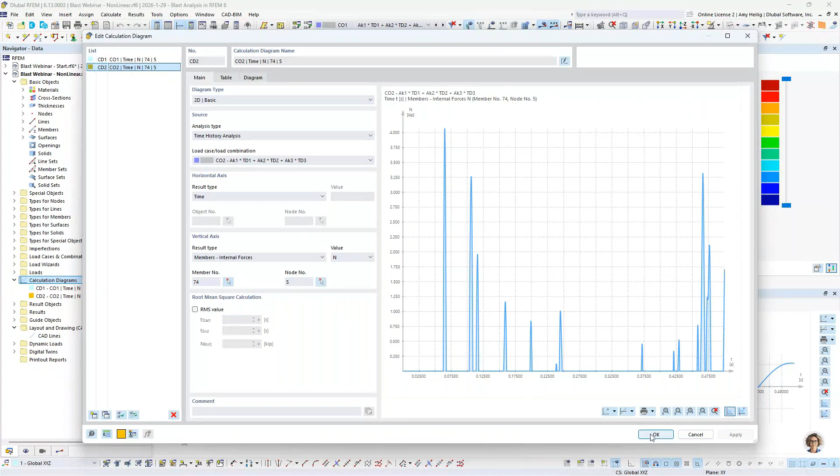Okay, so that will wrap up our full example today, going through both the linear time history analysis as well as the nonlinear. We'll go back to the PowerPoint here to wrap up today's presentation.